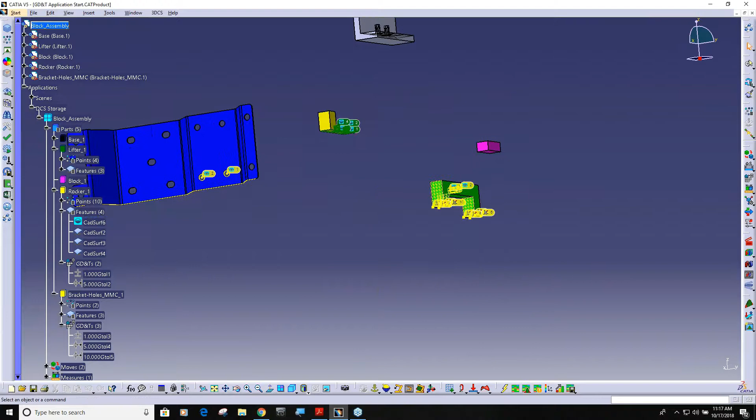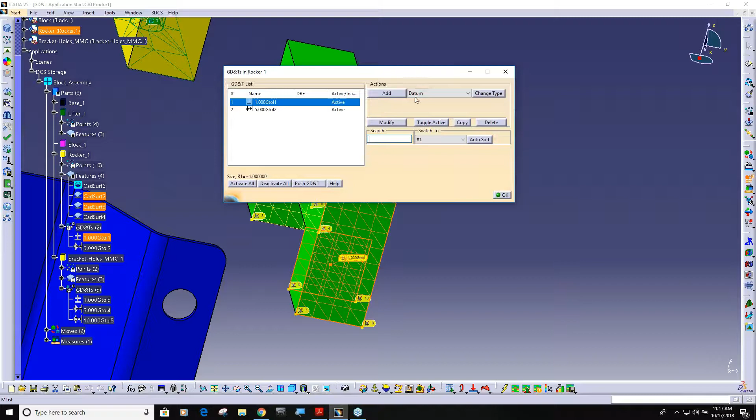Okay, so now I'm going to come back to this bracket here. And I'm going to put some datums on this so that we can start talking about some more GD&Ts. Oops. So now I'm just going to leave it set to datum. I'm going to call this A. Add that feature. Okay.

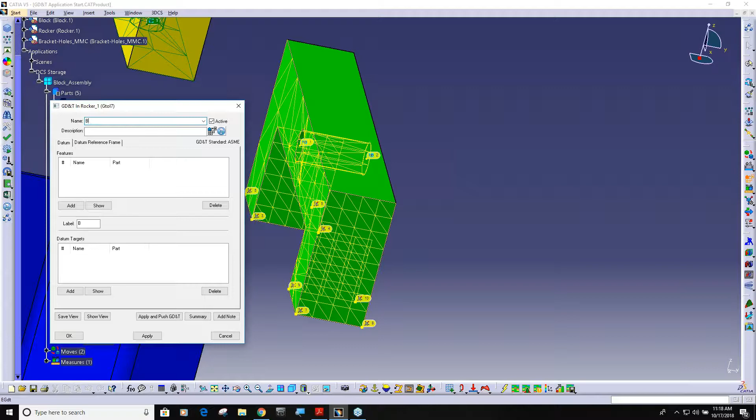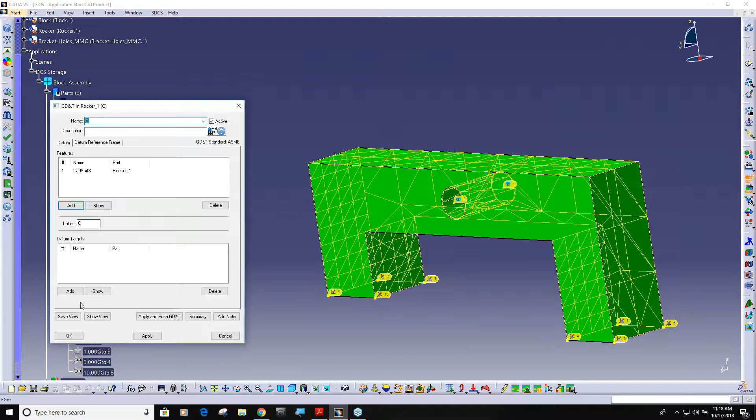Add another datum. Pick that surface. Okay. Add one more datum. Okay. Now you can see I have datums A, B, and C, but I want to put some pre-qualifiers on it, and I want to tolerance something back to a datum reference frame.

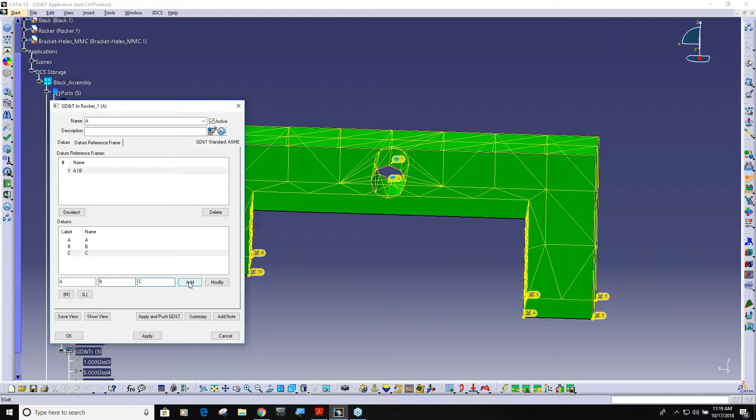So I can go into any one of these, and I can click on the datum reference frame tab, and you can see these are the features that I have. So I want a datum reference frame that is A and B, so I will add that. And I want another datum reference frame that's full blown. A, B, and C. Now I have two datum reference frames.

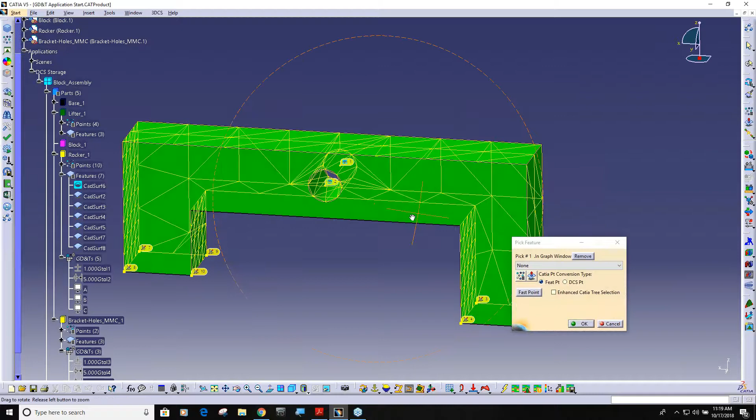So with that, I'm going to go ahead and I'm in my rocker, right? Yeah. So now I'm going to add a perpendicularity tolerance on this feature here. 1 millimeter. It's a surface, so I don't have a modifier, and I want to go back to just A and B. Okay.

So now you can see this surface is tipping and rocking within its perpendicularity tolerance back to A and B. This surface is deviating with its linear tolerance back to this surface, which is deviating due to a size tolerance on this surface.

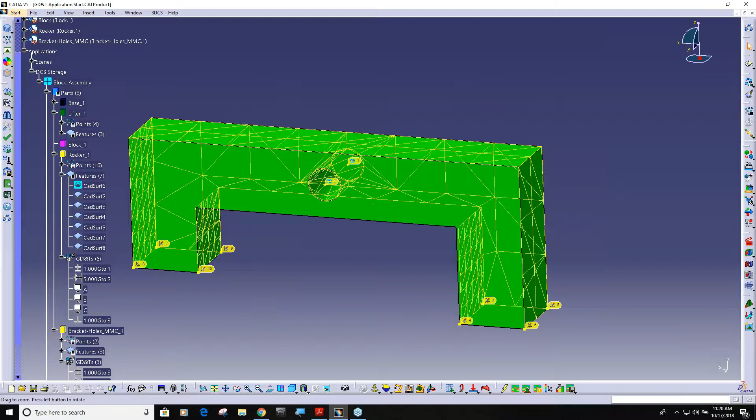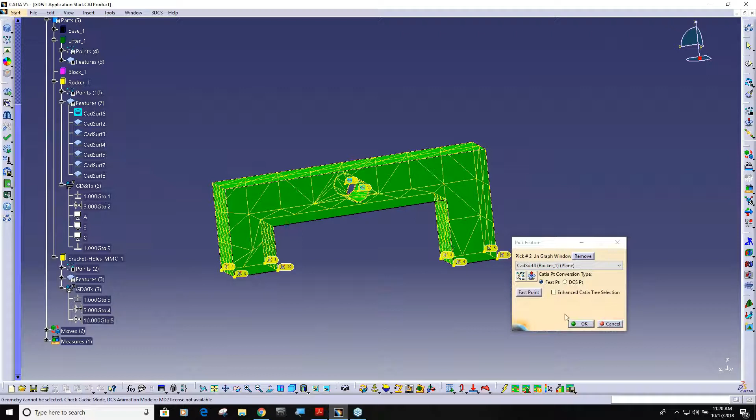If I continue on and I say I want to add a profile tolerance to this surface, back to A, B, and C, 1 millimeter. Now this is where if I do a nominal build, separate, and deviate, you can see that this is moving a lot more than 1 millimeter.

This I'm hoping we will ultimately add a validation error that tells you that this surface is double toleranced. It's toleranced 1 millimeter to A, B, and C, and it's toleranced 5 millimeters back to this surface. So you can't do that, and if we can catch it, we'll warn you.

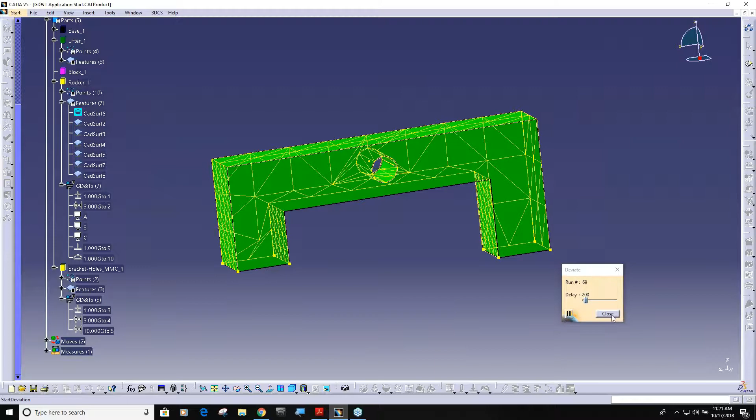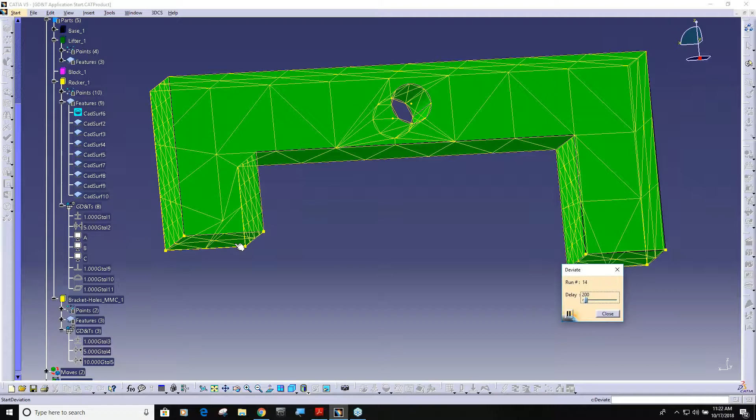What I do want to do, though, is I want to talk about common zone, and I'm going to put a flatness tolerance on these bottom two surfaces. And say, okay. Now, flatness, we know, is a refinement of location and orientation. And you can see those surfaces are deviating for its form control, because we are deviating from nominal, it's essentially treating it like it's a common zone, if you apply flatness to two offset surfaces and you define it as a common zone.

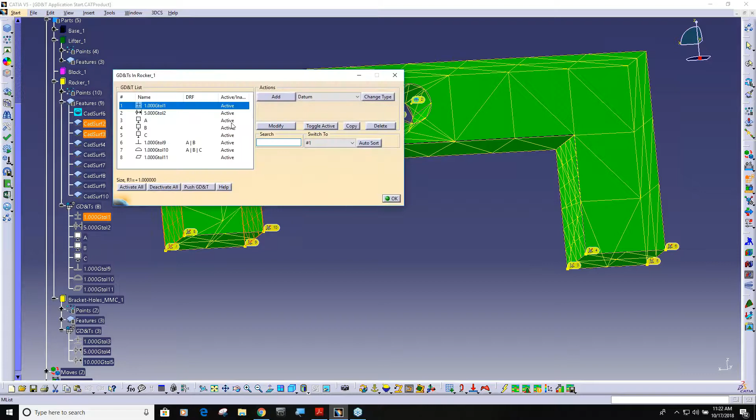Now, if I continue on and I add a profile to that surface, and I pick both of those faces again, and I'm going to make this 10 millimeters. Back to A, B, and C.

Okay, so now if you catch it, you can see those are changing in form, but they're definitely not treated as common zone. Okay, so you have to, and this is when I'm training people with the software, I always say, hey, make your tolerances big, deviate it so that you can see what is it doing.

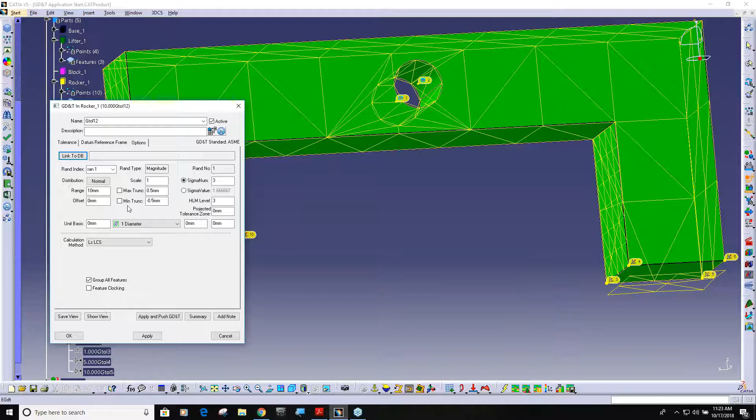This is an example where if I want to treat that form control as common zone and I have this profile tolerance, I would have to go into my options, and this is where I would want to say group all features for the profile tolerance. Now, when I deviate it, you can see it's still moving within the 10 millimeter tolerance zone, but it's taking both faces with them and they're deviating within that 1 millimeter form zone.